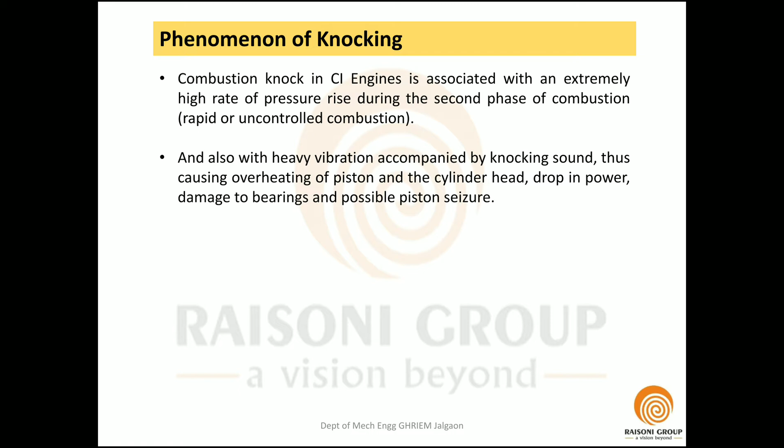and also it is accompanied with heavy vibrations, thus causing overheating of the piston and the cylinder head. There is a drop in power, damage to the bearings, and possible piston seizure. So this knocking is also accompanied by vibrations. As there is a pressure rise, vibrations are also accompanied, and this results in reduction in the power output, damage to the bearings, the piston head, cylinder head, piston crown, and there can be possible piston seizure also.

The injection process of the fuel takes place over a definite period of time in terms of degrees of the crank angle. As a result, the first few drops which are injected into the chamber pass through the ignition delay phase while additional droplets are being injected. So when the injection takes place, it requires a certain amount of time in terms of degrees of crank angle. Hence, the first few droplets pass through the ignition delay phase and subsequently additional droplets are injected into the combustion chamber.

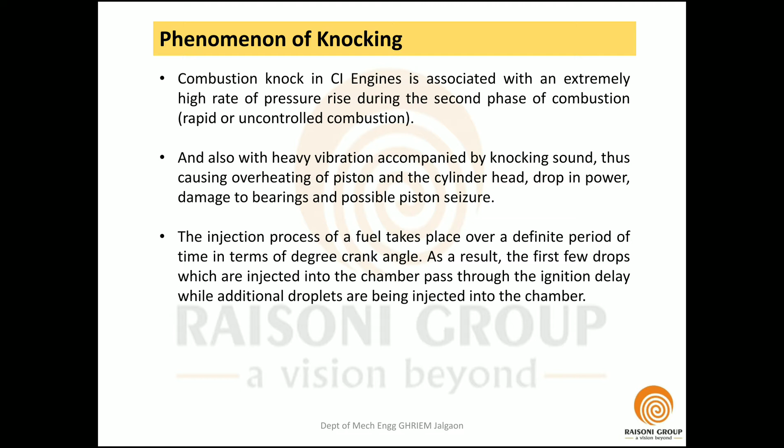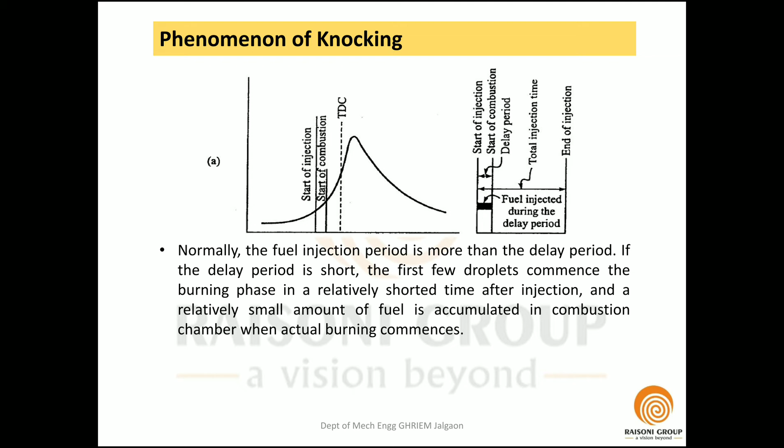Normally the fuel injection period is more than the delay period. If the delay period is short, the first few droplets commence the burning phase in a relatively shorter time and a relatively small amount of fuel is accumulated in the combustion chamber when the actual burning commences. So if the ignition delay is very small, the first few droplets undergo the ignition lag phase and commence burning. As there are no extra fuel droplets present, at the start of combustion the fuel available for spontaneous burning is very less, hence the rate of pressure rise is also limited.

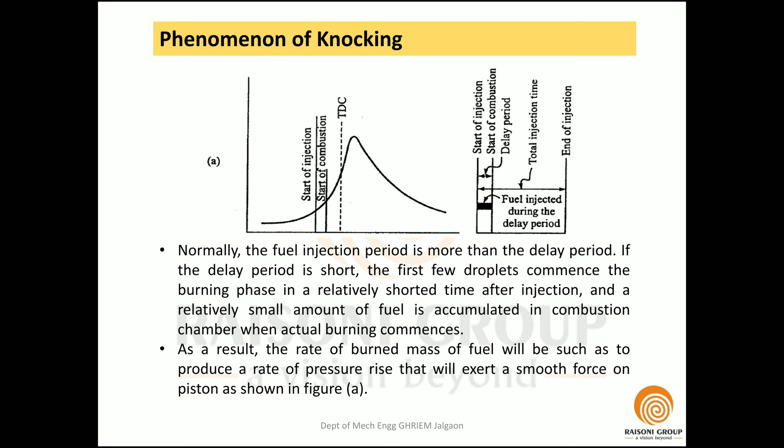As a result, the rate of burned mass of fuel will be such as to produce a rate of pressure rise that will exert a smooth force on the piston. And what happens due to this limited rate of pressure rise? It will exert a smooth force on the pistons and the engine operation is smooth. While on the other hand, in this figure, the delay period is relatively larger than the first phase.

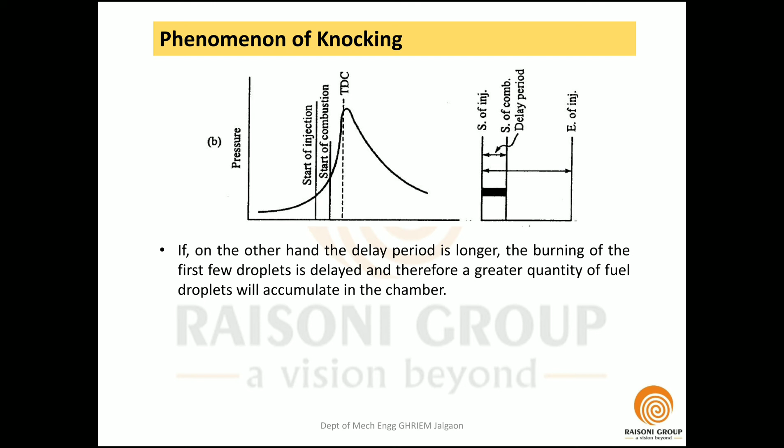If on the other hand, the delay period is longer, the burning of the first few droplets is delayed and therefore a greater quantity of fuel droplets will accumulate in the chamber. This delay period is relatively larger than in figure A. Hence, if the delay period is longer, more fuel droplets will accumulate in the combustion chamber. When the actual burning commences, after the start of combustion, the additional fuel may cause a rapid rate of pressure rise as shown in figure B.

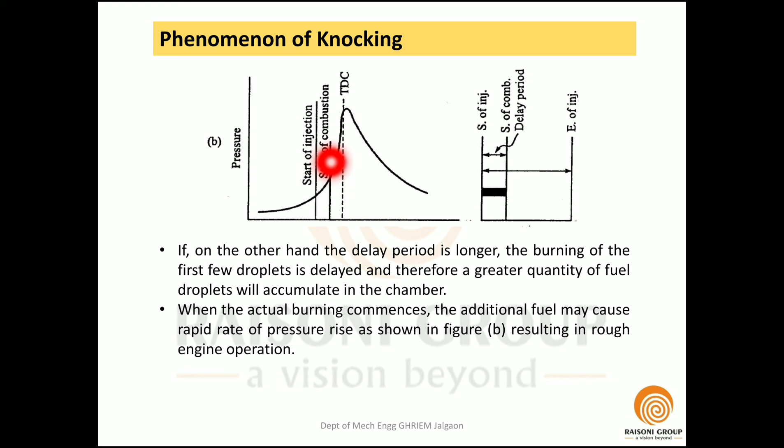So, if you compare figure A and B, the slope of this curve from the start of combustion to top dead center is more. What does this mean? The rate of pressure rise is more in this case than figure A. Hence, there is a rougher operation than figure A. In the first case there is a smooth rise in the pressure and the engine operation is smooth. Then there is a steep rise in the pressure, hence the engine operation becomes somewhat rough.

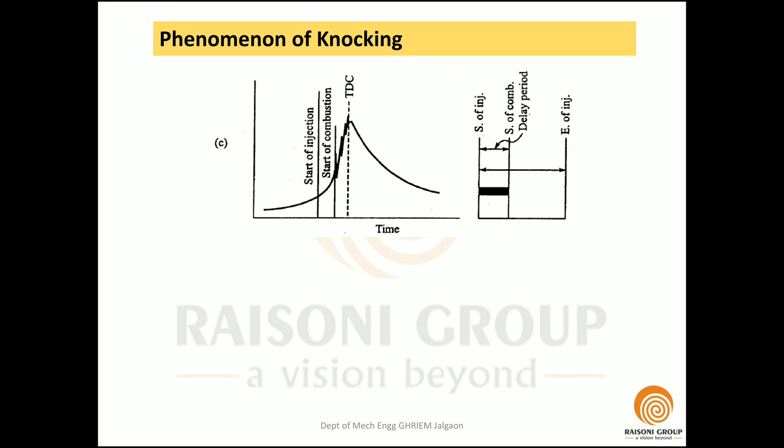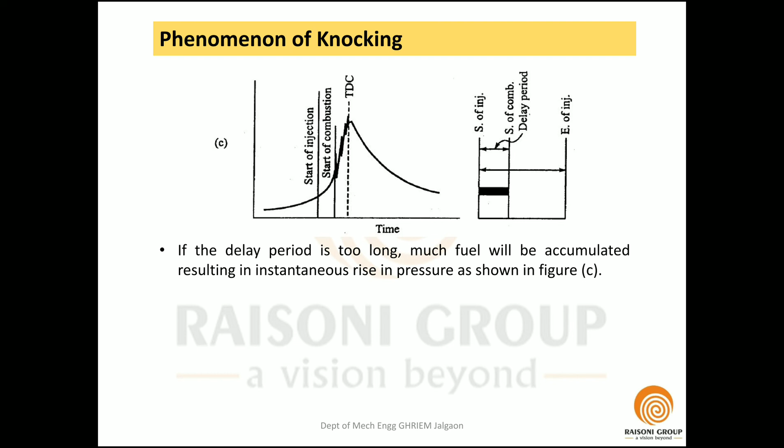And now if we further increase the delay period, as in this diagram, the delay period is larger than figure A and figure B. So if the delay period is too long, much fuel will accumulate in the combustion chamber, resulting in instantaneous rise in pressure. Due to this lengthier delay period, fuel injection is already taking place, so more fuel accumulates and gives rise to instantaneous pressure. Such a situation produces pressure waves striking the cylinder walls, piston crowns, and cylinder heads, causing knock and vibrations.

So what happens due to this very steep pressure rise in the combustion chamber? Pressure waves strike the wall of the cylinder and strike back, and they mix with each other, forming different amplitudes in the combustion chamber, and consequently give rise to a high pitched metallic ringing sound, which is called knock, and this is accompanied by vibrations.

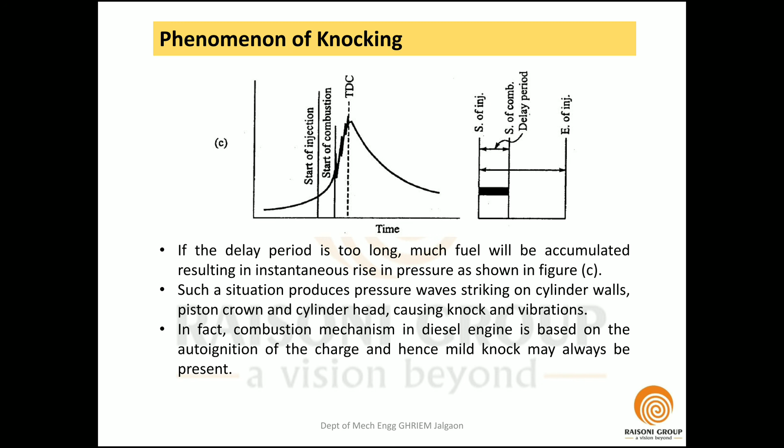So in fact, the combustion mechanism in diesel engine is based on auto ignition, and hence mild knock may always be present. As the basis for working of the compression ignition engine is auto ignition, knocking is always present, only the magnitude is very low. When it exceeds a certain limit, the engine is said to be knocking. Though the very long delay improves the mixing of fuel and air and makes the mixture more homogeneous, it helps the process of auto ignition and makes the engine more prone to knock. So this is about the phenomenon of knocking.